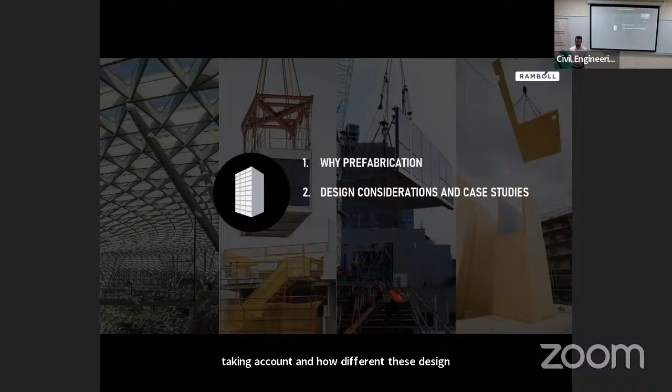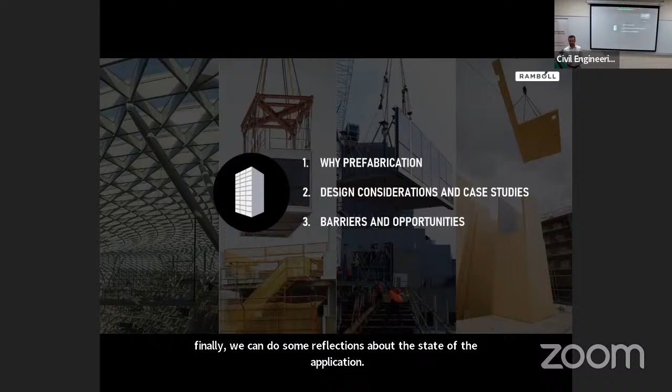We will do that by looking at some case studies which showcase the successful implementation of off-site manufacturing technologies for real projects. And finally, we will do some reflections about the state of the art of prefabrication, but also about what are the current barriers that prevent the wider adoption of prefabrication and modular construction within the industry, and what opportunities lie ahead of us.

We will also see that prefabrication usually comes with other terminologies often associated with it. We often hear about MMC, modern methods of construction, but also modular construction, DFMA, design for manufacturing and assembly. So today we will familiarize ourselves with all of these different terms. So without further ado, let's get started, and let's start off by asking ourselves the number one question we should always ask when we try to innovate and change the way that we've been doing things, which is why?

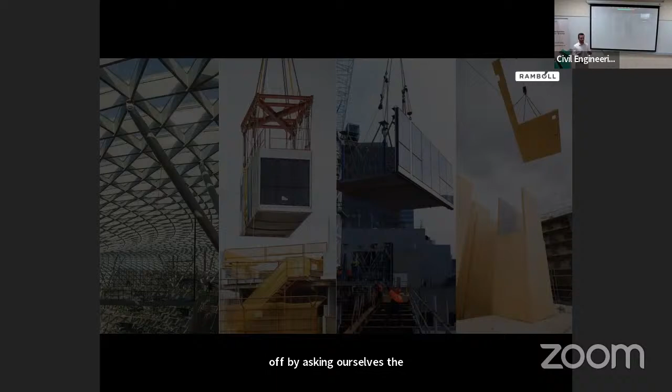Why prefabrication? Why is there a need to change how we have been designing and constructing structures and buildings for decades? To understand that, we should take a step back and look at conventional construction methods to really identify what are the key challenges associated with it.

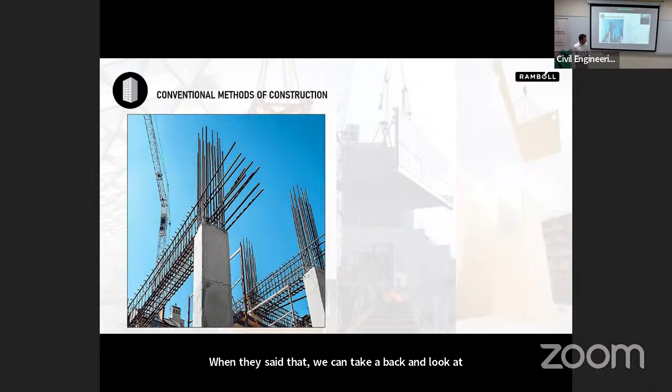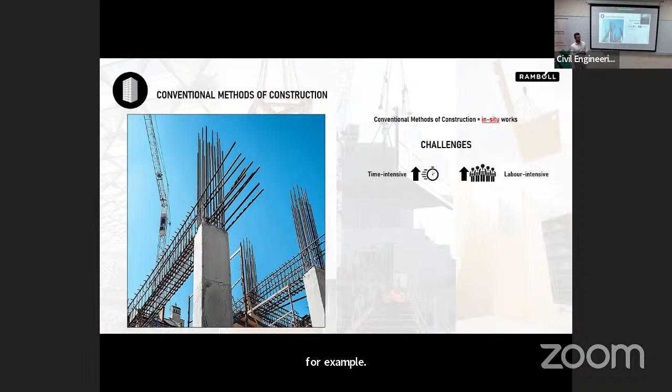Conventional construction encompasses several methodologies and different materials, but those usually have a common denominator, which is in situ works. In situ works means that we build structures and buildings which are already on site and in the final configuration. Now, typically, projects that utilize conventional construction face issues related to the time intensity, but also the high amount of labor which is required on site. Now, these two factors are often associated with a level of unpredictability of events that can happen on site, such as delays due to weather conditions, like flooding, or due to the procurement of material. So all of this usually results in low efficiency of the sites.

We also have additional issues such as the high carbon footprint, as well as the high level of noise and construction waste. So all of these problems that we face with conventional construction typically result in low productivity, as well as low quality of the products that we can achieve. And last but not least, a huge environmental impact.

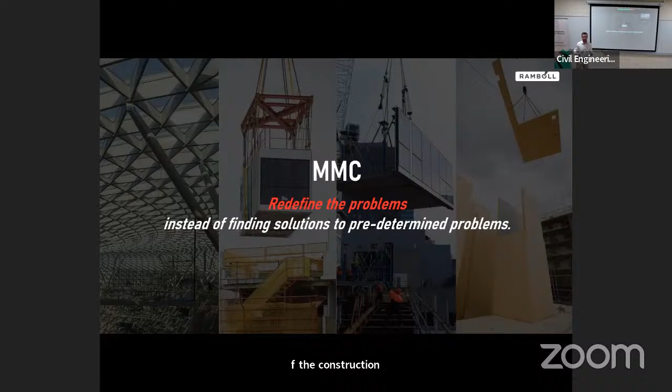So in this kind of scenario, that's where prefabrication comes into play and helps us. And if we take a step back and look at MMC, which is modern methods of construction, that is the broader approach. An interesting fact about MMC is that it doesn't try to solve the specific issues of the industry, but instead is rethinking the entire approach much more holistically, looking at all the aspects from design, construction, manufacturing, assembly, and even rethinking the engagement models and the collaboration with all the stakeholders involved during the project.

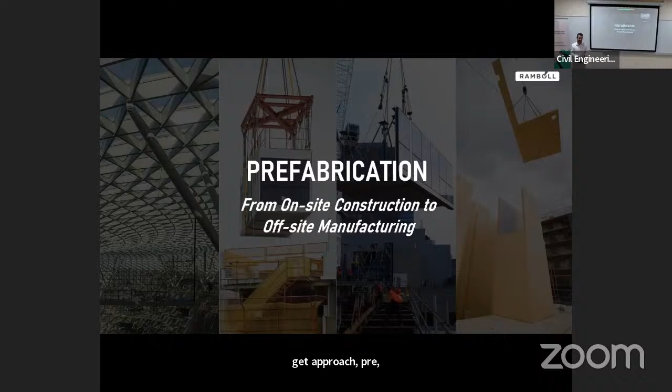And often with MMC, we also hear about prefabrication. Now, while MMC is focusing on the approach, prefabrication instead is about the process, and especially is the enabler for this radical shift from construction sites to assembly sites. And that happens through off-site manufacturing.

Now, talking about technologies which are available, there is quite a wide range of different systems that we can rely on in terms of prefabrication. And those can be grouped into macro categories by system typology. There are particularly three types of macro categories.

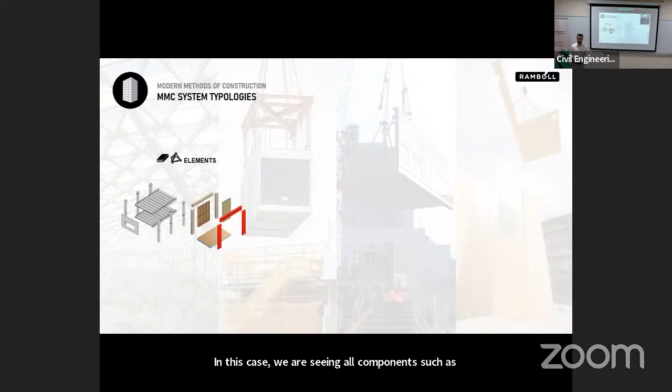Number one is elements, also called kit of parts. In this case, we have single components such as slabs, beams, columns, or walls, which are prefabricated in a factory. And once prefabricated, they are transported to site for installation. This can use different materials, from reinforced concrete, steel, timber, or composite materials. And usually, this is among the three different system typologies the one that's been in the industry for the longest time, and for which we can rely on a well-developed supply chain.

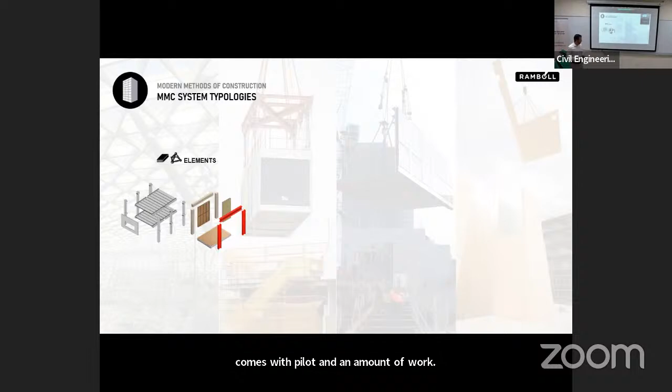But usually, this also comes with quite an amount of work to still be done on site, such as the MEP installation and architectural finishes. So a way to push the elements further is by looking at volumetric. In this case, we don't just prefabricate single components, but we also pre-assemble those to form complete volumes. And to take volumetric one step further, we can extend the pre-assembly of the volume not only to the structural components, but also to the MEP and architectural finishes, so that the volumes will be pre-finished. That's what usually we call in the industry prefabricated, pre-finished volumetric construction, or PPVC.

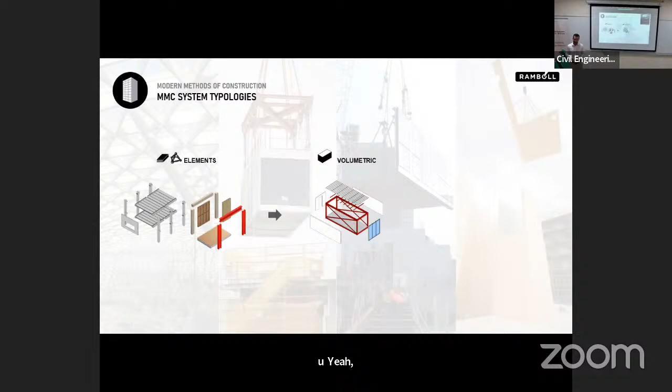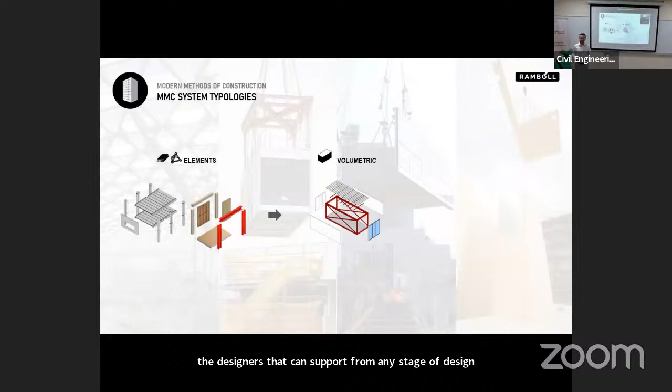The advantages really maximize the benefits of speed, quality, safety, and sustainability, but usually come with some constraints, such as a reduction in clear ceiling height, as well as some loss of floor efficiency, for example because of a double column situation or a double wall. So those are important considerations that have to be taken into account by all the designers and consultants who work from every stage of design, so that we can come up with a well-developed and coordinated design solution which can correctly implement the technologies on board. Another constraint would be the logistics that have to be taken into account.

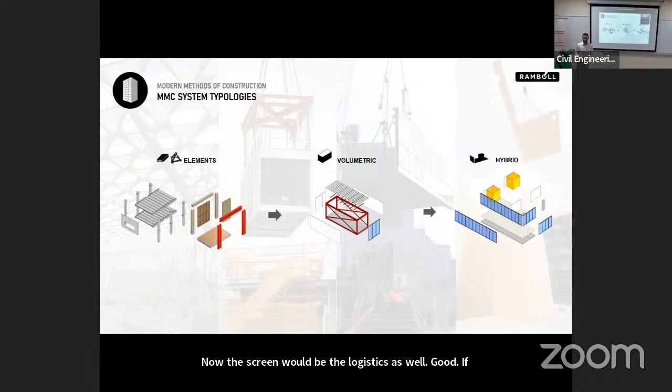Now, the third typology is the hybrid. The beauty about the hybrid is that it brings together the advantages of elements and volumetric. We still prefabricate single components, and we want to also pre-assemble them, but they don't have to form a complete volume. It could be, for example, that we have a floor which is pre-finished and pre-installed to a prefabricated facade, and then at that point transported to site for installation. Or we may be looking at a prefabricated bathroom pod or kitchen pod, which is prefabricated off-site, transported to site, where it will be installed together with the kit of parts of columns, beams, and slabs.

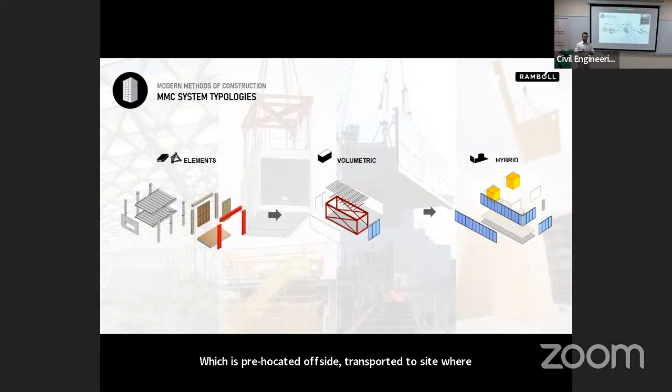Doing that gives us more flexibility on the design, and at the same time, we can still obtain all the benefits of speed, quality, and safety. So it's really a way of overcoming some of those constraints which are often linked to volumetric construction.

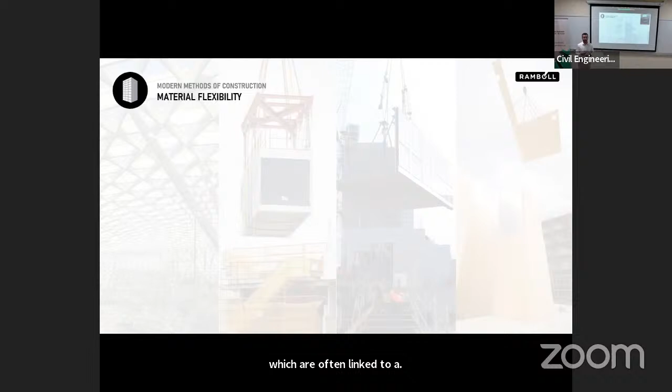Now, speaking of flexibility, we also have material flexibility when it comes to prefabrication. We can build systems utilizing steel, concrete, timber, or hybrid materials. For example, we may be looking at designing a volumetric component where we want to use a lightweight flooring system,

for example, in order to ease the logistics by reducing the module weights. But we could have a balcony which is already pre-installed to the module from the factory, and the balcony will be subject to more aggressive environmental conditions. And in that case, we want to use a more durable material, such as reinforced concrete. So mixing and matching different materials gives us flexibility to meet the project-specific requirements, but still maximizing the use of the materials available.

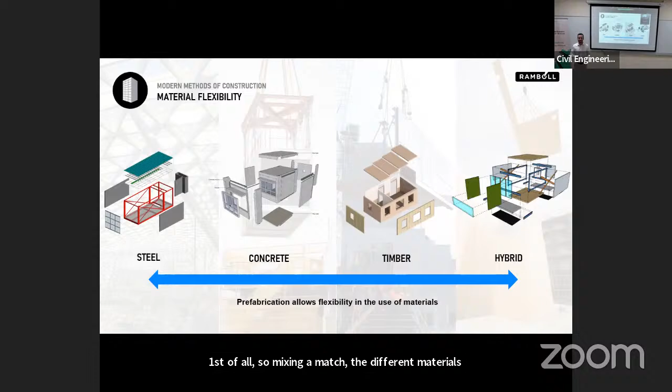Now, talking about benefits, we quickly went through this just now with the system typologies, but let's delve into this in more detail. The number one advantage that often comes with prefabrication, and it's probably the most fascinating, is the speed of construction.

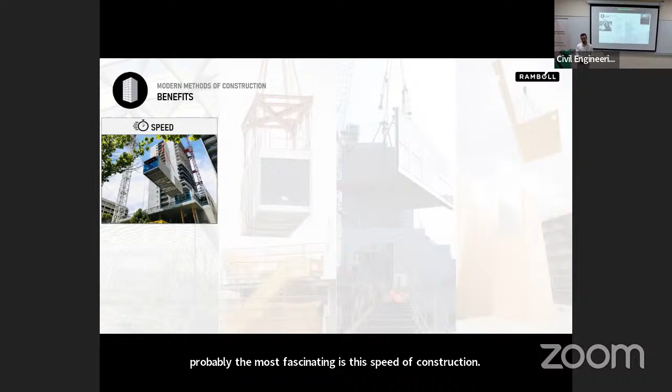By concurrently prefabricating off-site and also enabling the works on site, we can really maximize the speed, which is particularly beneficial, especially for those projects which are located in densely urbanized areas subject to further urbanization, where speed is a key driver for the project.

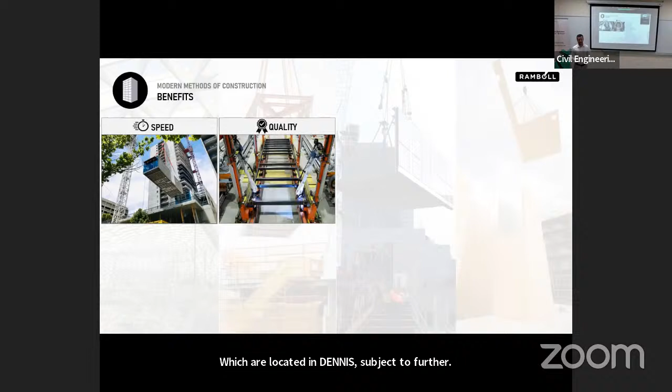Additionally, we also have the quality to be achieved by shifting the construction to a controlled environment, and also the safety which can be obtained because of the controlled environment, so that the workers will be working with less hazard. But we also have sustainability, which is another important aspect.

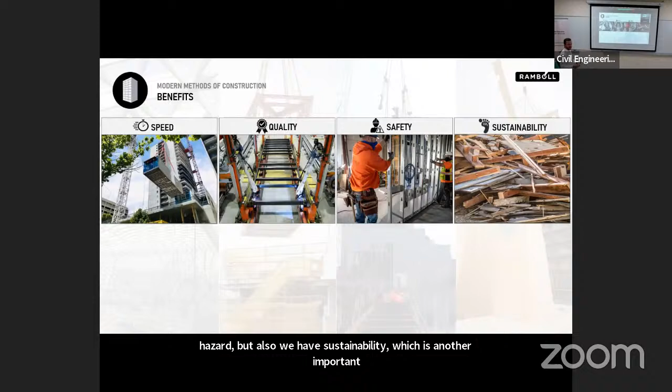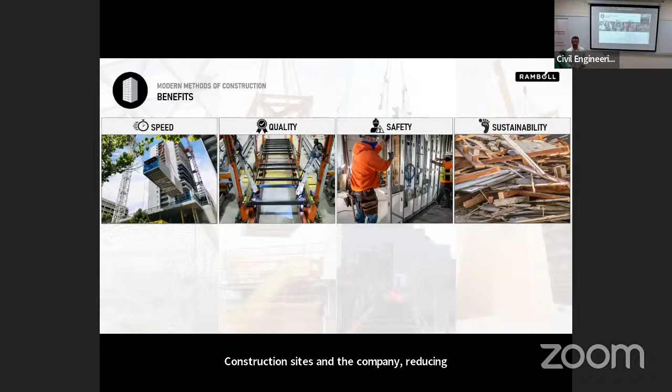Sustainability is very important, especially in the climate crisis that we are currently witnessing. Sustainability can be achieved from many different fronts, from minimizing the construction waste, as well as reducing the energy consumptions due to the on-site activities, but also by preserving the biodiversity with less disruptive construction sites, and ultimately reducing the carbon footprint. This can be done particularly because prefabrication helps us promote more carbon-friendly materials.

So we can shift the construction towards materials which are innovative and more carbon-friendly compared to the materials that we normally use for conventional construction. Also, reduction of disruptions. This comes especially regarding noise disruption, particularly important for those sites, those projects which are noise sensitive in dense urbanized areas.

This is probably a good summary of those benefits which are the more tangible ones, those benefits that we can really see at the project level. But there are also additional advantages which come with prefabrication, which are not as tangible at the project level, but we can benefit from that at more of a society level.

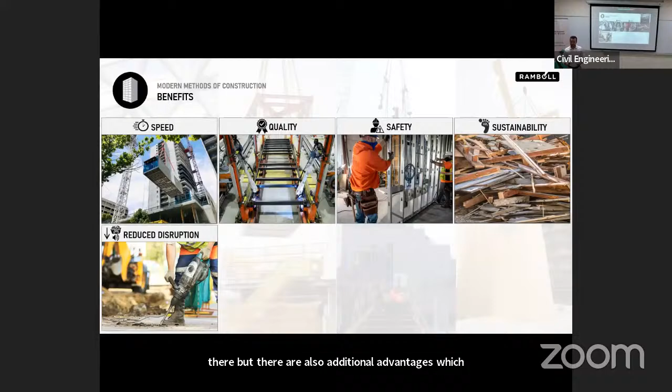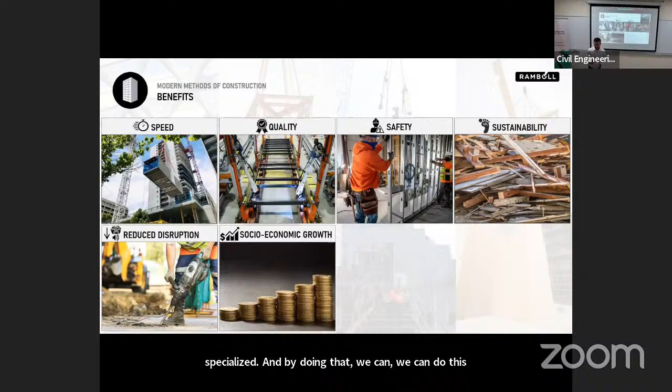And this includes socioeconomic growth. We can use prefabrication to actually create socioeconomic growth for the country itself. That can be done by upskilling our workforce to become highly specialized, and we can do this, for example, through training and education. By doing that, MMC and prefabrication can become the catalyst for the country's growth, and that's particularly important, especially in those countries which are growing economies.

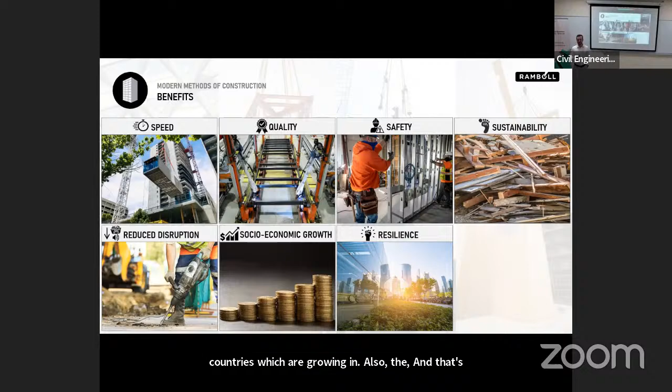Also, resilience that we can achieve - we can build more resilient cities. That's because of the quality control of the products that we obtain from off-site manufacturing, but also because we can design and construct in high seismic zones. So using prefabrication helps us build more seismic resilient cities.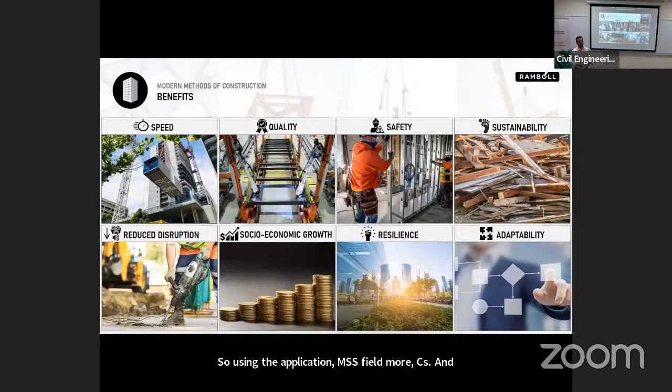And ultimately, we have adaptability. Using prefabrication helps us build more adaptable structures and buildings, and that's very important, especially in today's society where there are continuous changes in requirements.

Now, with this overview of what is MMC, what is prefabrication, and what are the key benefits, let's now talk about the design considerations. We will do that by looking at a few case studies which showcase the successful implementation of prefabrication technologies.

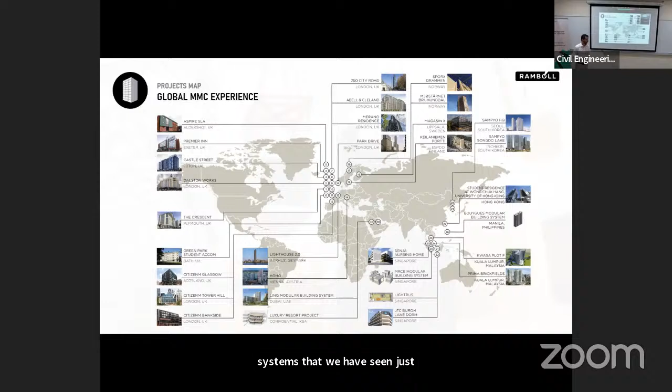Over the years, Ramboll has done a number of projects in different geographies and continents, and those projects encompass all the systems that we have seen just now in the previous slide, from kit of parts to volumetric construction. In the next couple of case studies, we will expand on a couple of these projects to really see how we have managed to use different system typologies to adapt to project-specific requirements.

The first case study takes us to Hong Kong, where we recently completed a 20-story building for the University of Hong Kong.

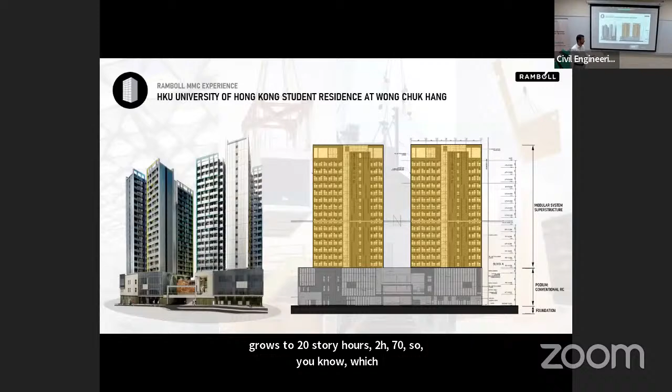It's a student accommodation, built in 2023, almost 1 year ago. It includes 2 towers of 20 stories, 17 of which are modular volumetric construction on top of a 3-story conventional podium and foundation. By starting at the early stage of design and working together with all the design and site consultants on board, we managed to achieve efficiency.

As you see in this table summarizing the number of modules we delivered, almost 1,000 modules with only 5 sizes of module variations, from M1 to M5, where a module size identifies the module chassis in width, length, and height. We achieved high repeatability and a minimum number of module size variations, which allows us to achieve cost effectiveness through economy of scale.

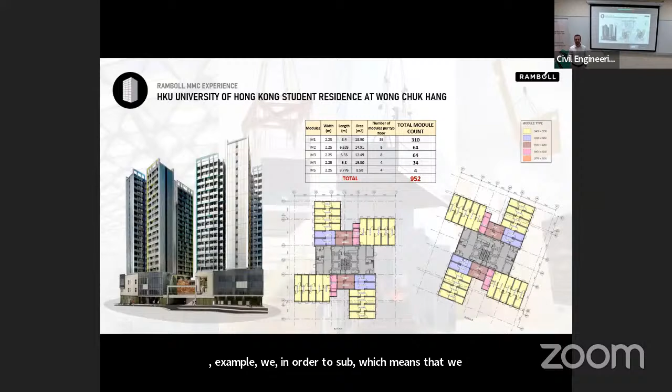It's important to note also that within a certain module size, M1 for example, we have substructural typologies, meaning we identify different structural components and optimize, for example, the column weights, so that we optimize the materials while also preserving standardization. So it was really about finding the sweet spot between standardization and optimization, which are often competing parameters.

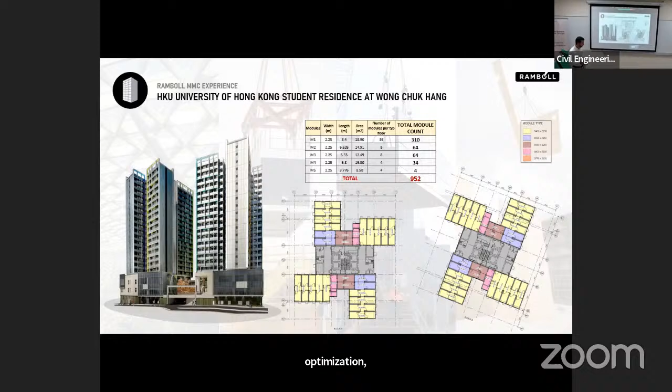Now the next case study takes us back to Dubai, where we did a collaboration with LINQ, the modular division of Alec Contracting, and the collaboration also saw the involvement of Emaar. In this project, we developed a modular building system suitable for multi-story buildings, and as part of the system development, we also went through the process of obtaining the Dubai municipality in-principle approval for the modular building system.

As part of the development of the system, we wanted to put it in the context of a building, so we studied a case study which was an Emaar residential building designed and constructed using conventional construction, and we modularized it - converted it into modular - to see what to do in order to make it efficient for modular construction.

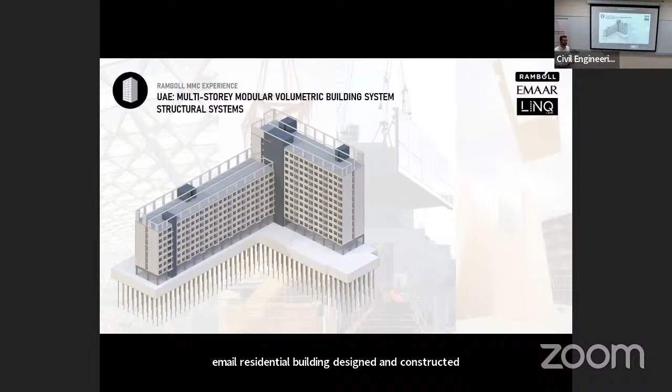Particularly, we identified areas of the building which are suitable for modular volumetric, which are the apartment areas. This was combined with other areas, the core areas, which instead provide lateral stability for the building. In these portions, we located the reinforced concrete shear walls, which could potentially be prefabricated shear walls, providing a dedicated area for lateral stability.

Often when it comes to volumetric construction for high-rise buildings, we want this combination of systems - modular volumetric together with a lateral force resisting system. The reason is that it allows us to release the modules from the lateral forces. The modules will still be load bearing, but they will just take the gravity forces from permanent and variable loading, whereas the core walls will take the lateral forces from wind and earthquake.

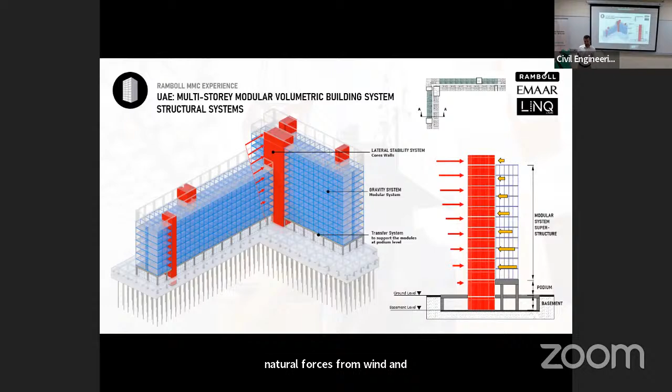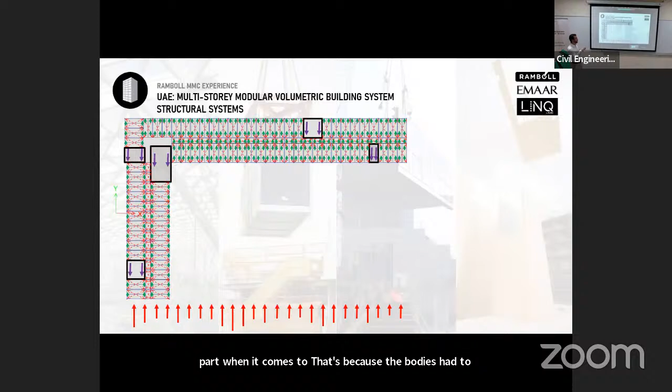It's important to note that even in this combination of systems - lateral force resisting system together with the volumetric construction - the modular volumetric still plays an important part when it comes to lateral stability. That's because the modules have to enable a load path which allows the lateral forces to travel from module to module and back to the main lateral force resisting system.

So the modules will act as rigid or semi-rigid diaphragms, transferring those forces from module to module. In this context, you can see how important the connections between the modules are - what we usually call inter-module connections. These are usually of two types: a vertical connection which connects the module below to the module above, and horizontal connections which connect two adjacent modules at the same floor and take in-plane forces from diaphragm forces from wind and earthquakes.

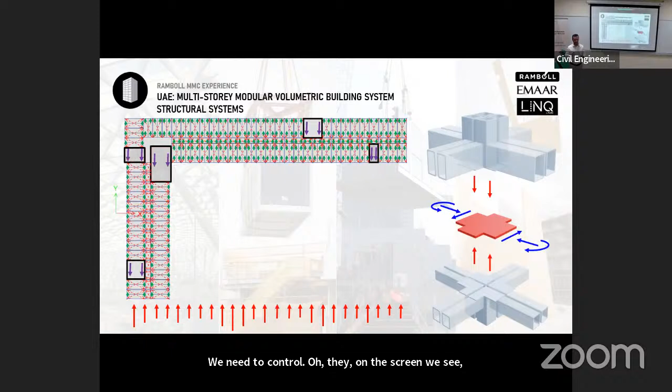On the screen we see a typical example of connection for modules utilizing steel chassis, but if we have RC modules, the same principles still apply. As part of the design process, we start with the global analysis to analyze forces, reactions, lateral drift and deflection, then get to the element design and finally to the inter-module connections, doing additional localized finite element analysis and modeling to understand the forces and stresses that develop within those connections, ensuring they comply with code requirements. Especially in regions like Dubai and in seismic regions, it's very important to ensure ductility on such connections, which is a very important characteristic for buildings located in seismic regions.

Another important aspect when we look at prefabrication, and particularly for modular, is design for logistics. We have to understand the module weight, and we do that by developing the design to a level where we know the components from a structural point of view, but also MEP and architectural, because for volumetric, often all of this comes together from the factory. That's important because the weight and size of the module can drive transportation, hoisting, even storage and installation sequence. These are all important aspects that have to be taken into account from the design stage so we can ensure whatever we are designing is compliant with the constraints we will have on site.

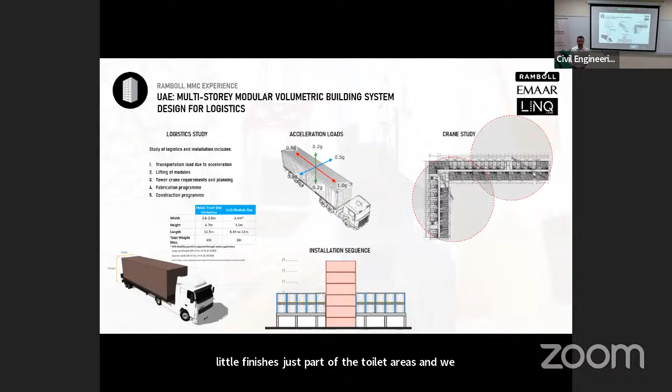Another important aspect is the forces and accelerations that the modules will be subject to in the temporary case, from the moment they are manufactured to the moment they're transported to site and installed. Those accelerations can potentially damage the modules. In most cases the modules come with all finishes pre-installed, and we can have brittle finishes such as marble for toilet areas, so we need to avoid damaging those areas because that would incur additional costs and time to fix.

Another case study takes us to South Korea, where Ramboll collaborated with Sampyo, one of the largest concrete manufacturers and precast suppliers in South Korea. Sampyo approached Ramboll because they wanted to develop an innovative precast system with three requirements: it had to be a prefabricated system, it had to be a load-bearing wall system capable of taking lateral forces, and it had to be implementable for high-rise buildings.

So we looked at a system we previously developed for non-seismic regions - a double wall, or twin wall, system - and developed the design further to be suitable for high seismic regions. This system includes two precast slabs prefabricated from the factory. Once precast, they are held apart by a steel lattice girder, so once it's prefabricated there is a void in between the two slabs.

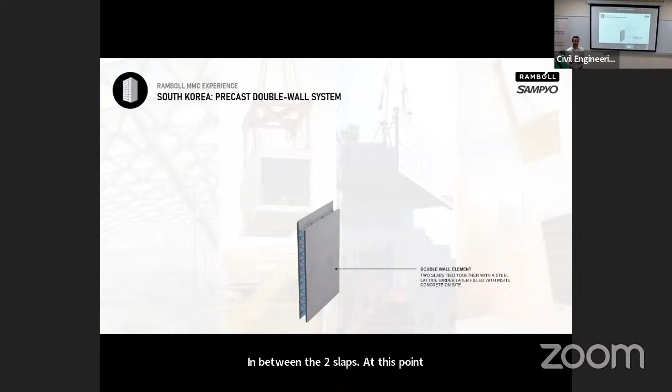The wall is transported to site where it's installed in its final configuration, and then the floor plate is also installed. The floor is generally also precast using a half slab system. At this point, in situ concrete can be poured into the gap, achieving a monolithic joint - giving us the benefits of in situ construction with a monolithic joint, very useful especially in seismic regions, together with the benefits of prefabrication, such as speed of construction

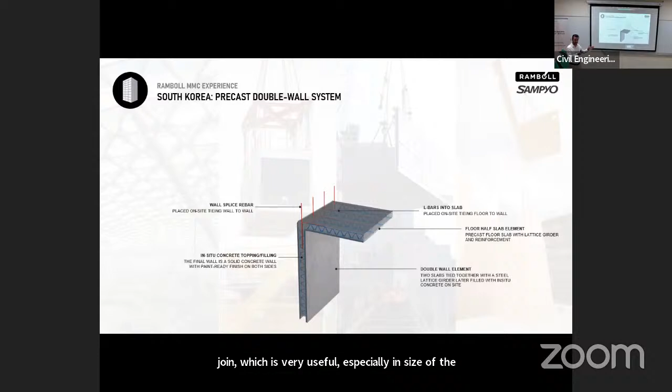and quality pre-finished surfaces of the walls. So it is a hybrid solution which gives us the benefits of both in situ and prefabrication.

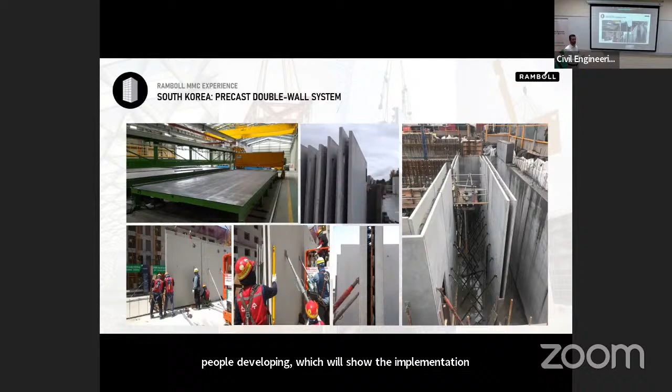As part of the system development, we also helped Sampyo develop a mock-up showing the implementation of this double wall system at a smaller scale. Then the system was put in the context of a high-rise case study: the new headquarters for Sampyo, a mixed-use development including an office tower together with two office residential buildings connected by a podium. The focus for the case study was the office tower, which would be fully precast, unlike the residential towers, which would be in situ instead.

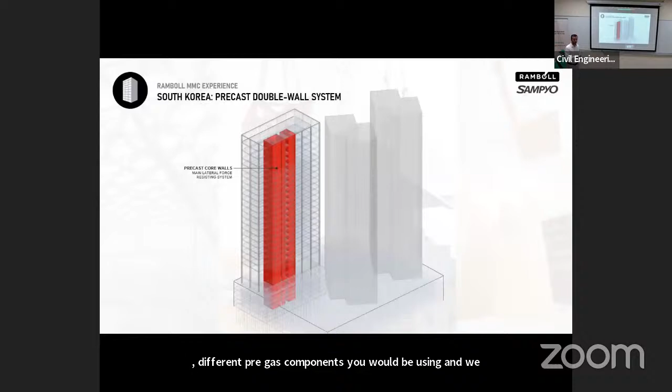So we made the tower fully precast and identified the different precast components we would be using, and we utilized the central core wall to implement the double wall system we developed. That would provide lateral stability to the building, acting as the main lateral force resisting system.

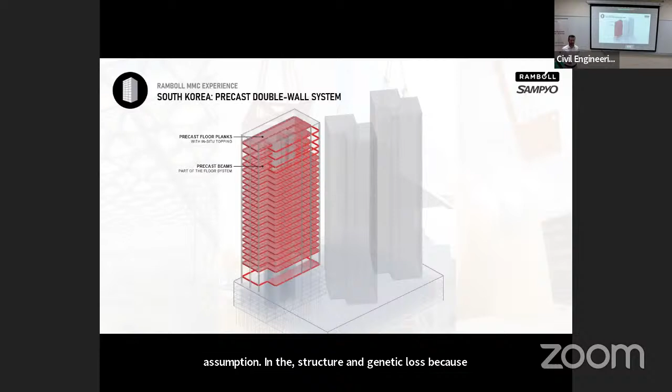This was a very important assumption in the structural engineering philosophy, because it allowed us to release the rest of the structural components, such as columns and beams, from the lateral forces, which promoted standardization and repeatability. We also have precast facade and a common podium which connects the 3 towers together.

Now I would like to talk about research and development, a very important aspect when it comes to fabrication. What we are seeing currently in the industry is that prefabrication is speeding up very quickly. We started off with prefabrication, precast, now volumetric construction for low-rise buildings, and quickly we are seeing implementations for high-rise buildings in seismic regions sometimes. So we see the industry moving very quickly towards prefabrication.

But often we also see that codes and regulations don't really keep up quite well with the speed of the industry, and also the academic world is struggling to keep up with that. There is not enough research in that. So it's important that we commit to doing research and development so that we can contribute by using our lessons learned, our experience, and further progress with the use of prefabrication within the industry for the future, pushing the boundaries and improving the quality.

As part of our commitment in research and development, we do collaborations with universities. This is particularly a collaboration that we have done with Monash University in Kuala Lumpur, where we studied the behavior of high-rise modular buildings under seismic actions.

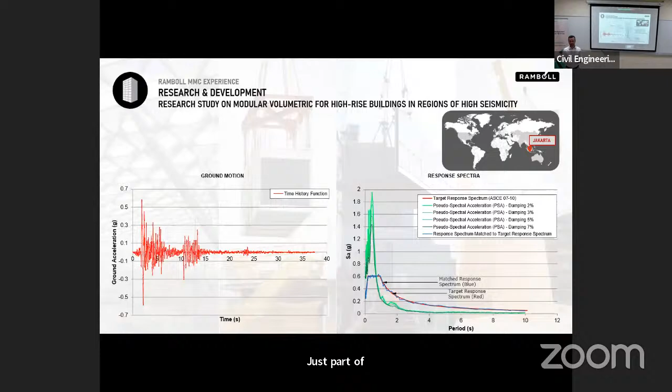As part of this study, we did a performance-based design to really understand what are the ductility requirements when it comes to modular volumetric construction, and how it works together with the main lateral force resisting system, which in this case was located in the 4 core areas again.

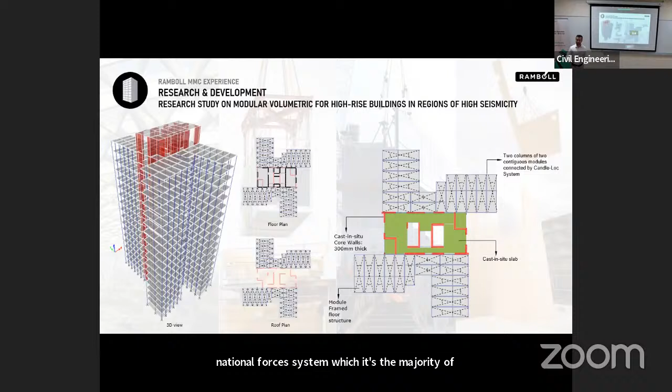Even if we have a main lateral force resisting system which takes the majority of lateral forces, we know that for high-rise buildings subject to earthquake forces, buildings usually undergo large displacements, which means that the modules, even if they don't tend to attract a lot of forces, they still undergo large displacements. So we have to ensure that the components of the modules can take those large displacements without failure, which is a compatibility displacement issue.

As part of the study, we did the research, we successfully completed the research, and this was published last year.

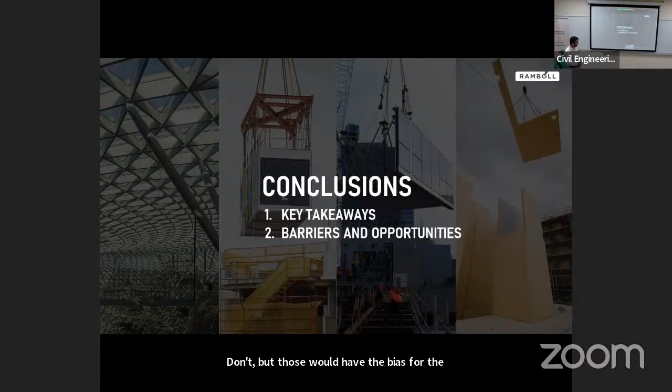Now I would like to, before we wrap it up, draw some conclusions, particularly looking at what are the key takeaways of this talk, but also what are the barriers for the implementation of prefabrication and the opportunities that we have with this innovative technology.

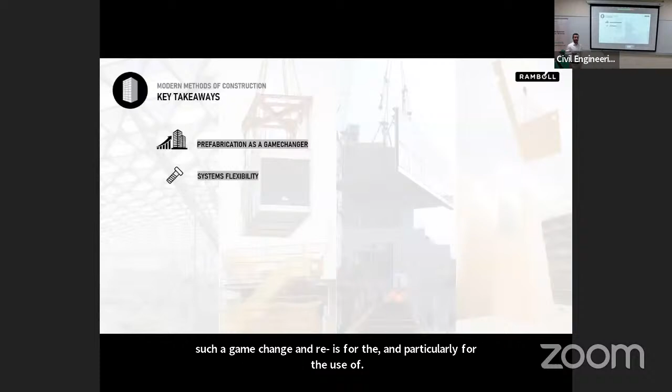Key takeaways: first of all, we have talked about how important and how such a game changer prefabrication is for the industry, particularly for high-rise implementation. The reason for that is because it allows flexibility, due to the different system typologies which can adapt to different building and project requirements.

But also, there are important design considerations, which we usually call design for manufacturing assembly. Those design considerations can be different from the design principles associated with conventional construction.

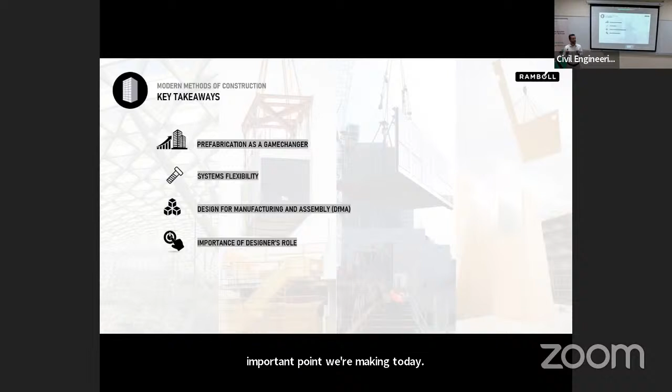That takes me to the last point, which is the importance of the designer's role - probably the most important point that we're making today. The designer has to be able to design for modular, to design for prefabricated systems, and identify what is the most suitable technology that can meet the project specific requirements.

In terms of barriers and opportunities, what we are currently experiencing is an increased interest in modular and prefabrication, seen at all levels of the value chain. But there are also some barriers which prevented the wider adoption of prefabrication.

There are a number of barriers that we have identified, that we have experienced with our projects, and maybe we can have a discussion after this talk, but this is just a summary that we have developed.

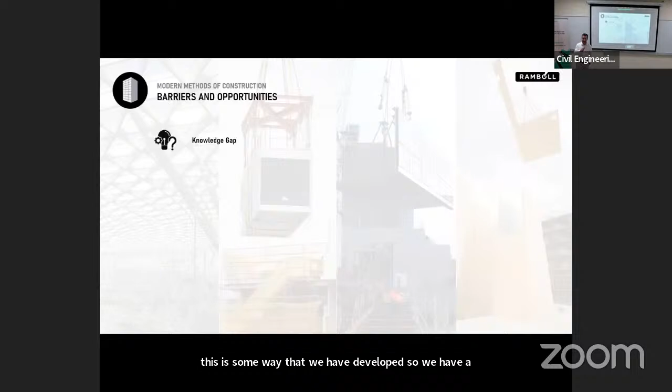So first of all, there is a knowledge gap, which is felt really at all levels in the project, from the developers to also the consultants - sometimes they're not able to design for off-site manufacturing - but also even manufacturers and contractors, because sometimes they perhaps don't know how to use a modular system for high-rise buildings.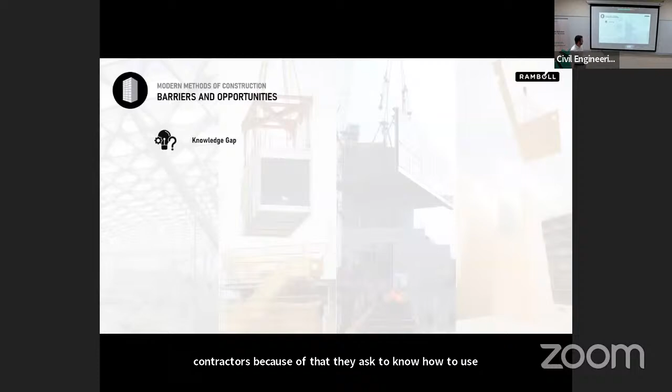The second point is about cost considerations. There is usually a price premium to pay when it comes to prefabrication, and that's usually because of the cost related to the setting up of off-site manufacturing capabilities, for example, for the manufacturer, and that can be seen as problematic or sometimes prohibitive for some stakeholders.

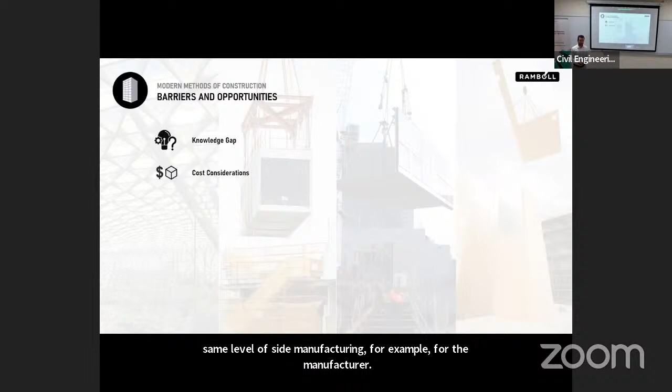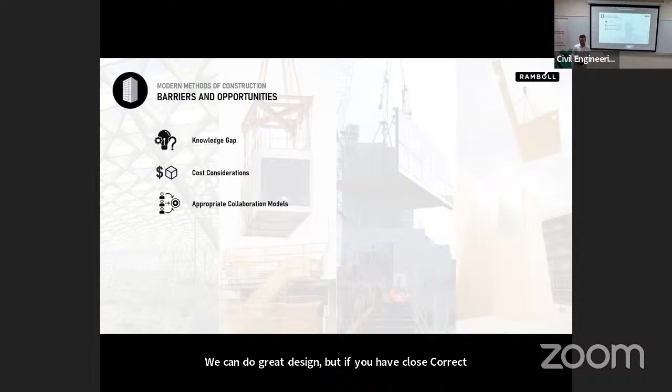Also, another important aspect is related to appropriate collaboration models. It's important to have the right models in place to successfully deliver projects. We can do a great design, but if we don't have correct collaboration models in place, that can all go to waste, because we may not involve the manufacturer early in the design process so that they can contribute with their system and integrate it within the design.

Also, the approval process and regulation is another constraint, especially for those countries that don't have correct procedures in place for the systems. For example, that can cause delays and other risks in the projects.

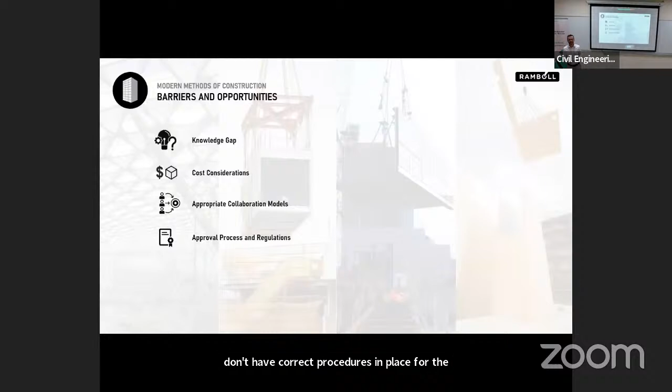Also, supply chain development. We have seen the supply chain developing quite a lot over the past years, but much more can be done. If we can achieve that, it can further enhance the use of prefabrication by cutting the cost further. Thus, price premium can go down because of the further development of the supply chain. We're also cutting the embodied carbon associated with transportation.

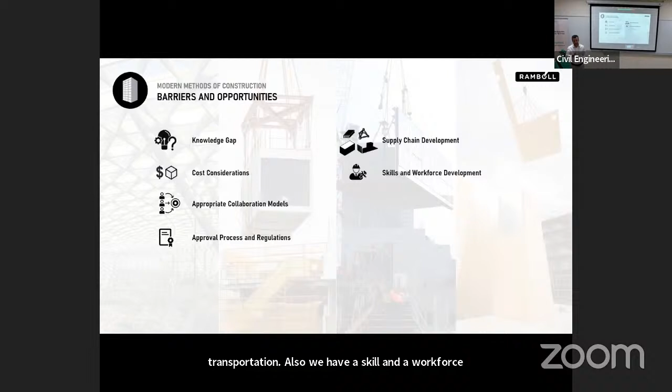Also, we have a skill and workforce development issue, because there is more that can be done to upskill the workforce so that they can contribute to the prefabrication processes which require these high skills.

Government support is another important aspect, because especially for those countries which are new to the technology, that price premium can be even higher, and having government support can help offset part of the price premium to further develop the use of prefabrication and modular within the country.

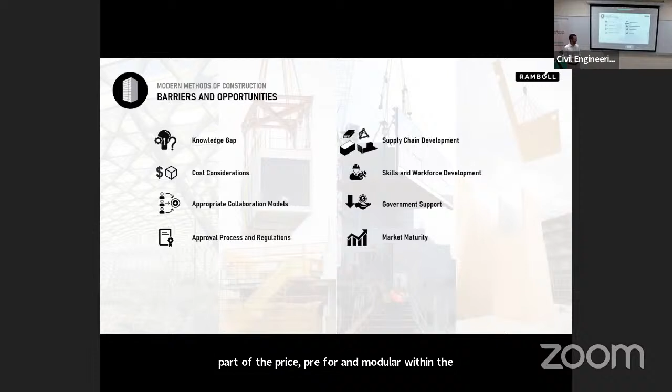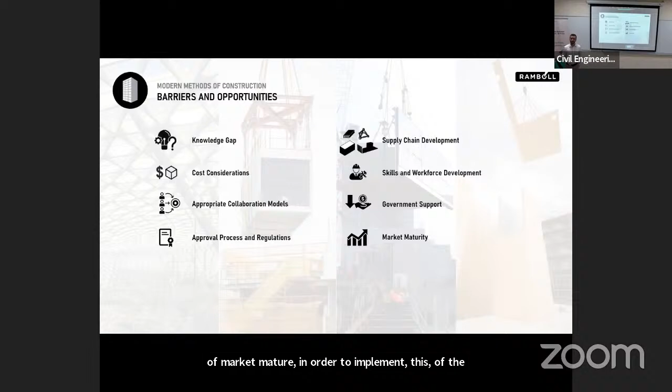And then the last point is about market maturity. We are seeing increased interest and acknowledgement of the importance of prefabrication within the industry by all stakeholders, but overall, I would say there is still a lack of market maturity to implement prefabrication at a wider scale. By tackling all of these issues and addressing them, we can turn them into opportunities for the development of prefabrication in the years to come for many more projects.

And with this, we come to the end of my presentation. I welcome any questions that you may have. Thank you.

Thank you very much, very interesting presentation, lots of examples. Thank you.

I think it's no longer nice to have. We always face pressure from our clients to start thinking modular early in design, even at the feasibility stages. We've been asked difficult questions around cost, speed, and return on investment, what's the advantage, is it better? So there is pressure on suppliers, obviously, but also on design. It's a difficult question, and the learning curve is really sharp.

I think it's very important that we get this interest from developers already at feasibility studies, because that's the point where we can add more value to projects. When it's the very early stage of design, there's much more that we can do. We don't work with so many constraints which we would have otherwise later on.

Sometimes we also see some project developers who want to convert into modular or prefabrication later on, and obviously it's more difficult to make it work at that point because we have to probably really constrain the design and other aspects that don't allow flexibility. It's important to see that, but you're right that the learning curve is very sharp because things are moving very quickly in the industry.

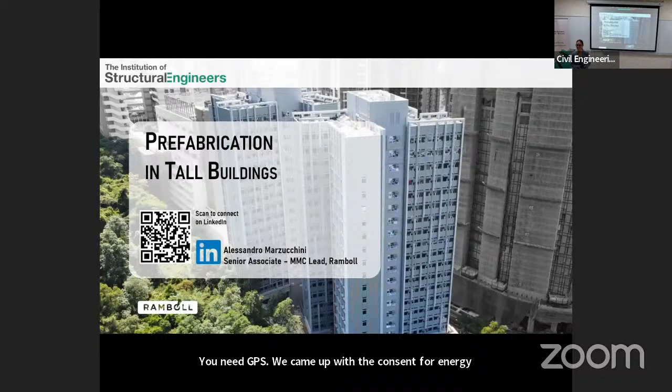To add, the American construction industry, CII, during the 80s came up with the concept for the energy sector, for industrial plants: PPMOF - prefabricated, pre-assembled, modular, offsite. They took the idea from offshore topside fabrication and brought it into industrial plants. This type of modularization has already been in the energy sector for the last 30 years, serving sites where we cannot send labor - difficult environments, difficult conditions. So as it is called in industry, PPMOF, now it is PPVC, and in some parts of the world called MMC.

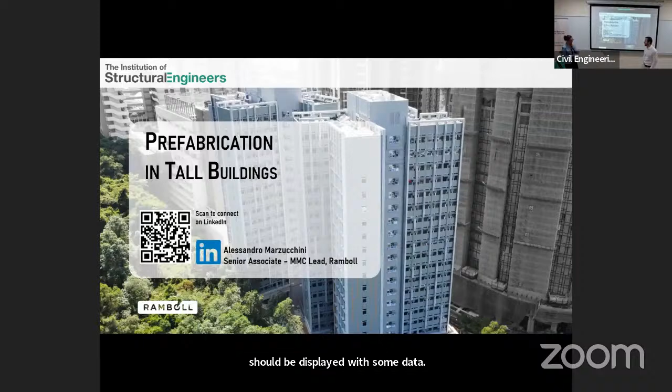Maybe Rehan, you give us a bit more - this one is a specific question. In terms of damping, the same process of damping that we use for steel structures and conventional structures could still be used. So there are no specific considerations when it comes to different damping compared to conventional.

Here's a question from Hari Krishna: how are the secondary effects due to imperfection addressed in this design? Since these are large modular units, you may not be able to achieve the same level of precision as you do with conventional systems.

Secondary order effects and imperfections are very important, especially for tall buildings using modular construction. This is another important reason why we often use reinforced concrete core walls together with modular construction - we use the verticality of the core walls to set back the volumetric part of the building so it will be better. Effectively, at that point you don't accumulate additional imperfections as you install the modules, because the verticality of the core sets you back to the main point. That's how imperfections are usually managed for buildings using modular volumetric construction.

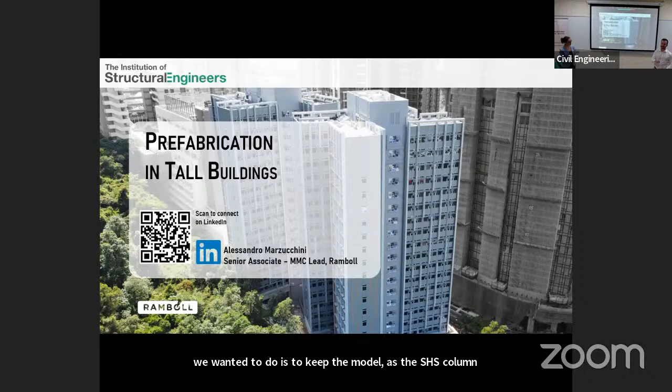The question about the columns is very good because I touched on this quickly in the presentation, talking about how we standardize the module sizes. We have only 5 module sizes in terms of chassis size, but within each module type we have sub-structural typologies. For example, we divide the building height into zones - we have 3 zones - in order to optimize the column weight. We wanted to keep the module sizes as they are, using SHS columns, and just changed the thickness of the walls. By doing that, we kept the connections standard because it didn't affect how the inter-module connections work, but at the same time we managed to optimize the weight, halving it going all the way up. So we found how to reduce material but keep the connections standard, which was very important. That's how the column optimization works, and it works similarly for the beams where needed.

In terms of the facade system, it really depends on the project - sometimes it's pre-installed from the factory, sometimes it's just installed on site. For the project I showed earlier in the case study, the majority of the facade is already pre-installed, but there are strips left in between the modules which are then attached on site, and that's how we create waterproofing.

Could we please? So it's not a structural technical question. I'm an architect, so I'll come more from the research and development side, because as architects we tend to move away from MMC when we have a building that's more organic, not 90 degrees, twisting and playing around, like higher buildings being twisted with a big hole in the center. When we talk about research around MMC, all I see are papers made by engineers, which is logical since you need an engineer for construction and MEP, but I think we need to pair them with an artist or architect who can push the limits of the engineers.

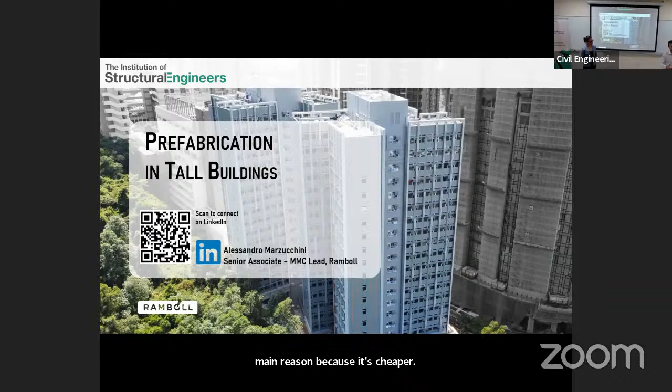But in a lot of countries, reinforced concrete PPVC is still being used, and the main reason is weight and cost - cost is the main reason because it's cheaper. Then there's probably the perception that reinforced concrete gives you better performance, for example in terms of acoustics, there's a perception that especially for residential buildings you will get better return compared to steel. So that's another reason. But both materials are used, and they have their pros and cons.

In terms of DM approval, what we did is we developed the system and went through the process of getting in-principle municipality approval for this multi-story modular building system. That included showing all the aspects - it wasn't just the structure part, but also MEP and architectural, just to show how the modular volumetric fully pre-finished system would work in principle.

Getting the in-principle approval from DM means they acknowledge that the system works in principle, but you will still need further project approval as you go on with a specific project to show compliance with code requirements and everything else. But they are at least familiar with the system, so that will streamline the process moving forward - it won't take us long because they already know how the system works in principle.

That's a procedure which is also followed in other countries, in Singapore, in Hong Kong - this in-principle system approval. The authorities require that so that later on it takes much shorter time to approve the system when it's implemented on a project, especially if used in a standard way. If it's used in a non-standard way, that could potentially require extra time.